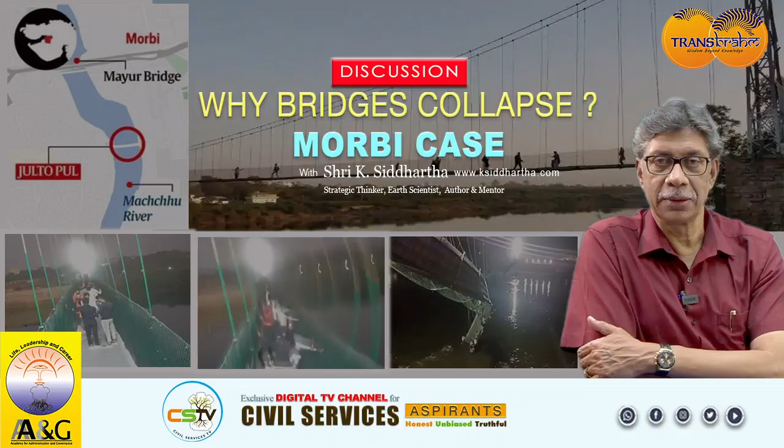By now, this must have become a familiar video for you, although it is pretty painful, quite heart-wrenching, but then this has to be accepted. That is the collapse of the Morbi suspension bridge.

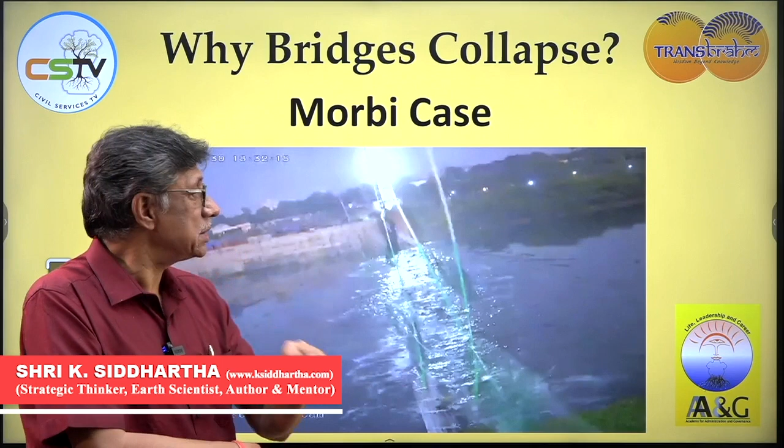Morbi has been one of the most unfortunate towns one can imagine, largely because it was this city which experienced a devastating flood due to the burst of a dam in 1979. Some of you may recall it was one of the incidents that inspired the making of the movie Satyam Shivam Sundaram, also based on a dam burst.

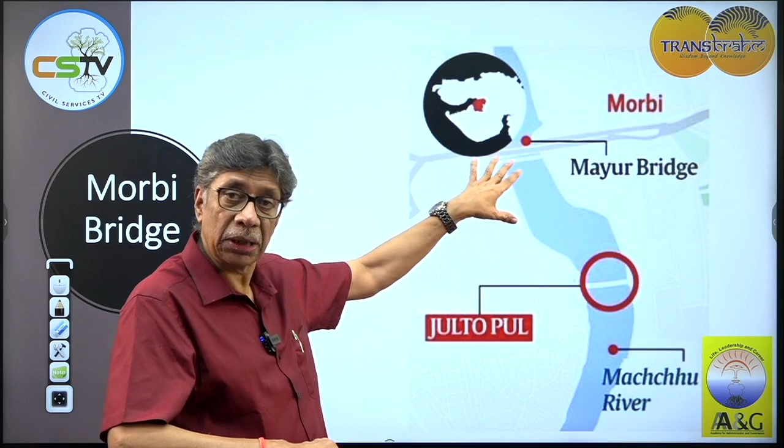Morbi is essentially a small town on the Machchhu River in Gujarat, and it has a suspension bridge on this part. The Machchhu Dam is the one we talked about that collapsed in 1979.

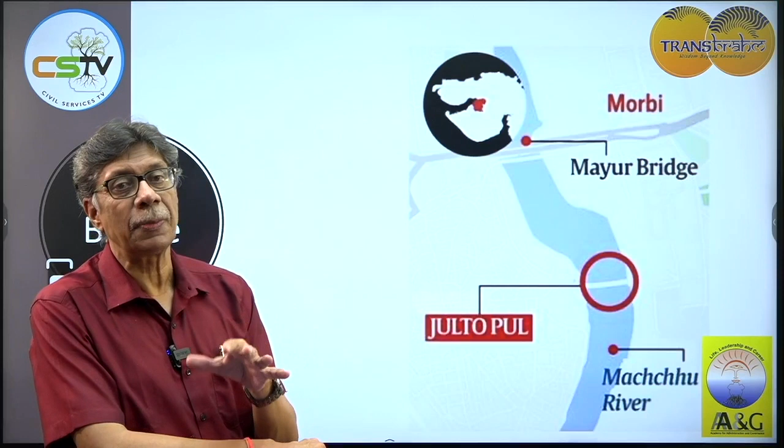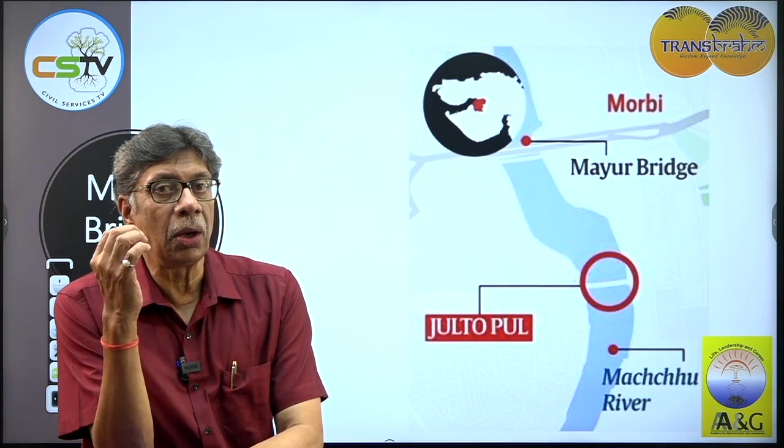Now, when you take a look at the manner in which the bridge collapsed in a single instance, that leaves a lot of things unanswered. What is usually expected in incidents like these is that in such bridges, one or two suspension cables give way, break, and the bridge hangs before the rest of the structure collapses.

With respect to Morbi, everything happened in a flash, because it is generally a slower process. The sudden collapse suggests that most or all of the suspension cables were weak or corroded. This is possible considering it was a very old bridge, but we are also being told that the whole bridge was recently repaired. So, was it actually repaired, or was it some other case?

In Morbi, the vertical cables seem to have snapped entirely from the deck at one end, sending part of the unsuspended deck and those on it plunging into the river. It could have been due to straightforward structural damage, like a material fracture or a failure of a joint, that led to a cascading process of failure—meaning one after the other, after the other.

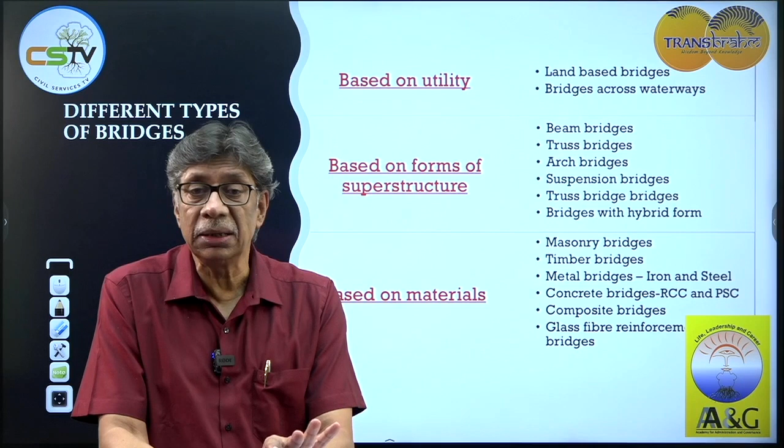These bridges are valuable forms of communication, and different types of bridges are made for the purpose of connectivity—that is, connecting one part of the country with another. But why is it that all types of bridges are made in a different manner and with different materials? To understand this, you must know that bridges come in a variety of types. Based on utility, they can be land-based bridges or bridges across waterways.

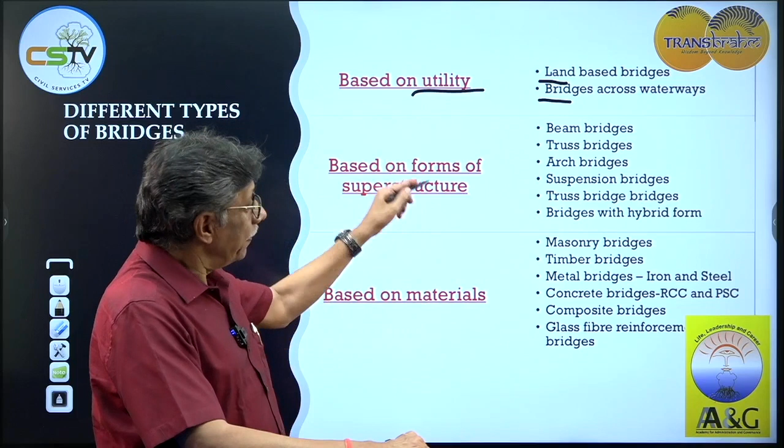Based on the superstructure, it can be a beam bridge—that's the type where you find beam pillars in the water, the most common of them. There's also truss bridge, arch bridge like that of Chenab, and suspension bridge like the Golden Gate, one of the most iconic bridges in that way.

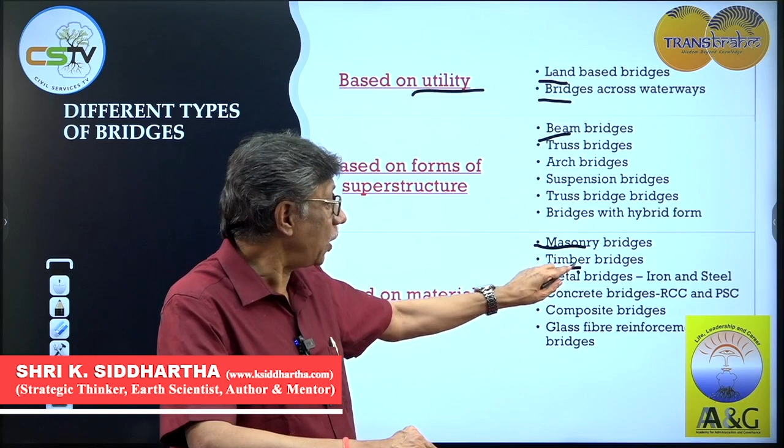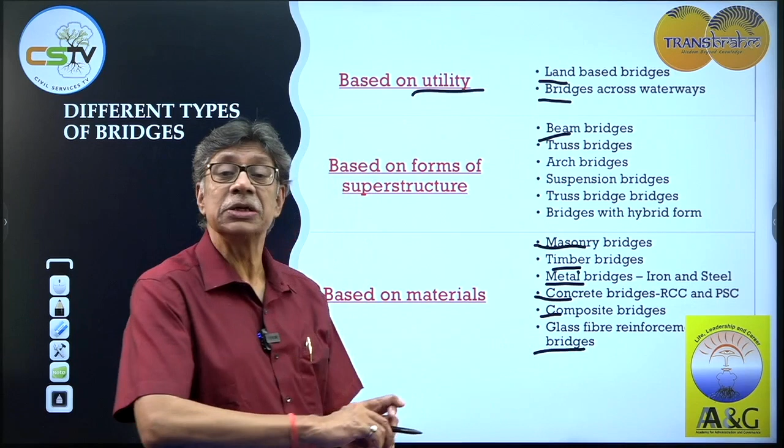It can also be a masonry bridge or timber bridge, based on material—timber meaning made of wood, masonry bridge made of bricks. There are also metal bridges made of iron and steel, like the Howrah Bridge, concrete bridges, composite bridges, and now even glass fiber bridges.

Now, when you take a look at the structure and design of it, you'll find it pretty interesting. That is going to be an arch bridge, this is an arch bridge, that's a cantilever bridge. In this case, this is a beam bridge, which we talked about—the most common type, where the deck is there and then there are pillars, and it is on these pillars that the whole deck rests.

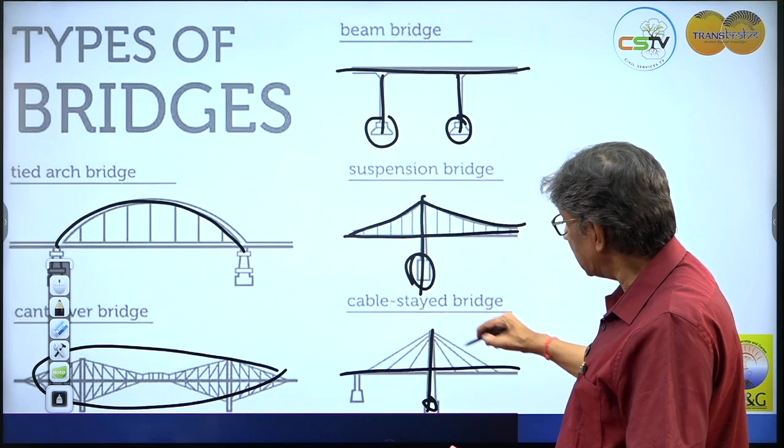Suspension bridge is going to be one of these pillars, very, very strong, and it is suspended in this place. Cable stayed bridges are going to be where the load is completely transferred, and there are different cables which hold it, and that is the way the bridge rests in this place.

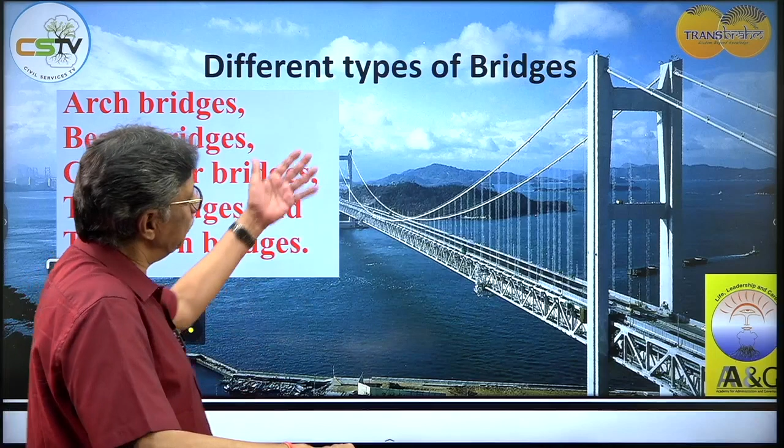The most common examples of it, when you take a look at the pictures, you will understand it as well. These are arch bridges, beam bridges, cantilever bridges, truss bridges, and tied arch bridges.

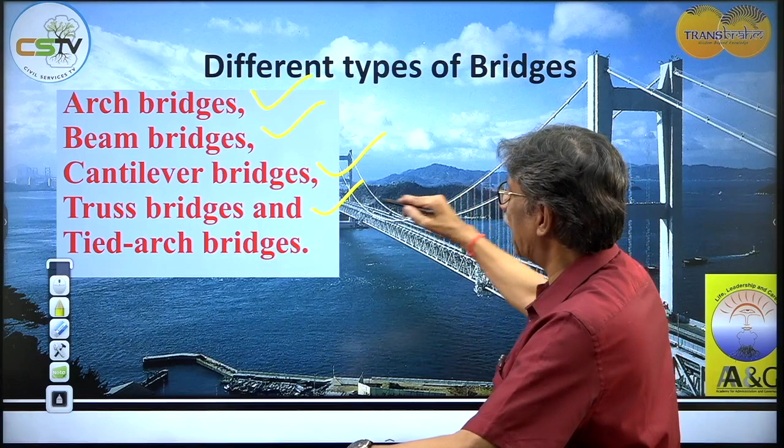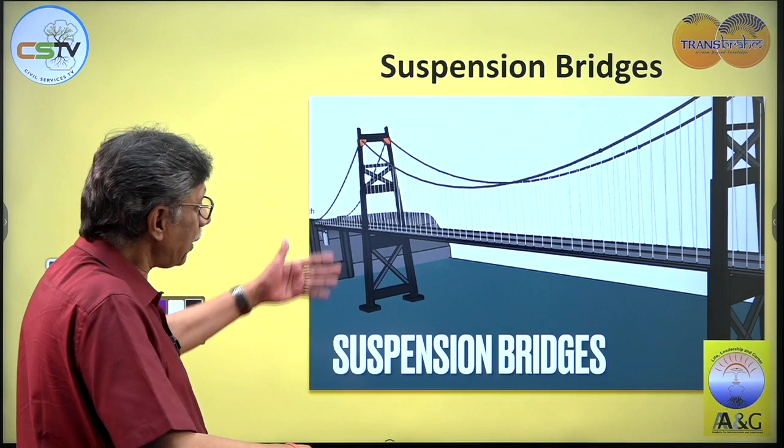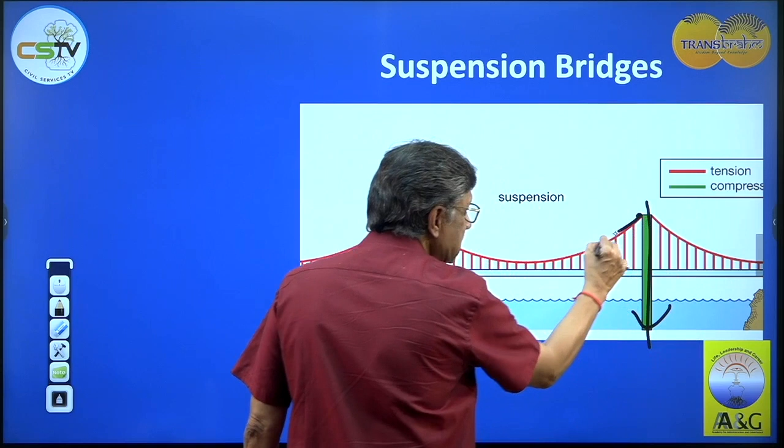These are the two cables. This is the true picture of the Golden Gate Bridge. Suspension bridge, that is the deck associated with it. Taking a look at another picture, suspension bridges are like that. These are the two pillars, and it is on these two pillars that the whole of the load of the bridge goes on to rest. And these are the cables responsible for holding the bridge. It is suspended on those type of materials.

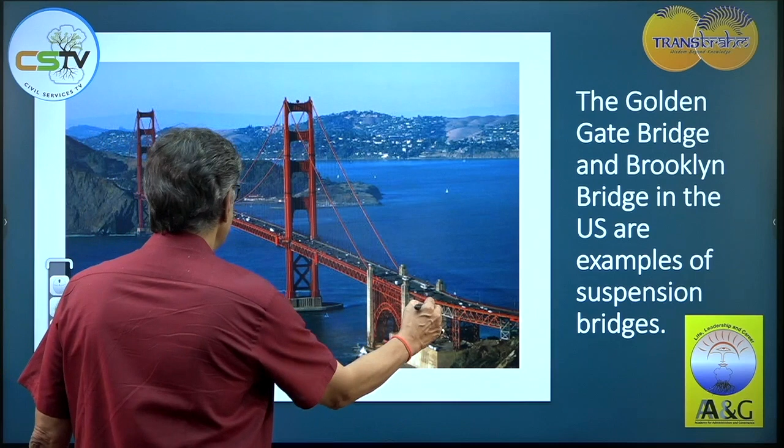The best picture of it is the Golden Gate Bridge and the Brooklyn Bridge in the United States, which is actually a brand of such type of bridge in the whole world. You may have seen it in a variety of movies, including the most recent one that was made on a tsunami.

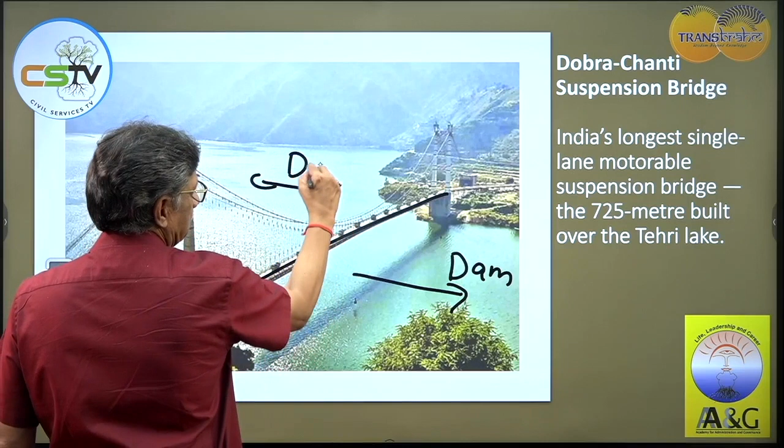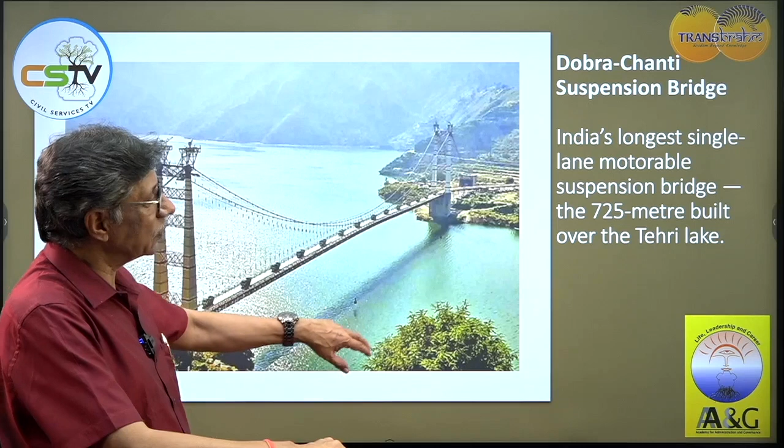It is going to be on this side is the dam, and this is where exactly the Tehri River goes on to flow. It is one of the most scenic bridges one can imagine in the whole of the country, and it's 725 meters, which means almost three quarters of a kilometer in its length.

At night time, it is a sight to behold, actually a sight to behold in the evening, and it is a tourist attraction in this place as well. This is the way that the suspension bridge manages itself.

There is a tower that is for the purpose of holding the load, and these are the cables that hold it all, and the load is completely transferred in this place. That is the anchorage. This is going to be the anchorage. That's going to be the deck, and these are the piers. Of course, this is the main cable, and there is the suspender cable in this case. That's the way the design is made.

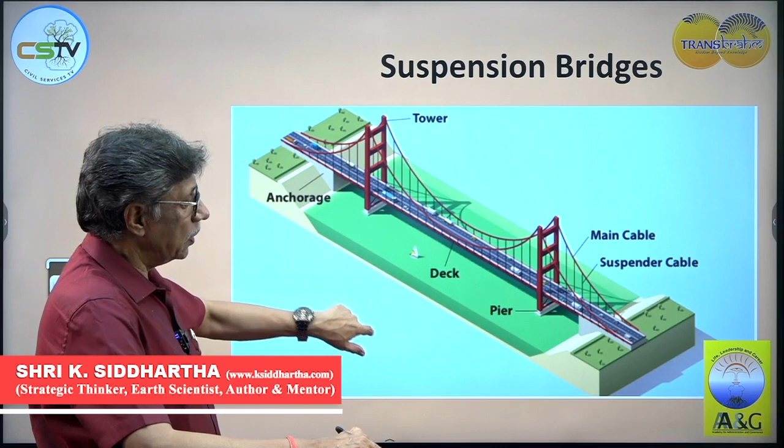Cable stayed bridge means it is only the cable that goes on to hold the whole of the bridge. That is, the deck is held by the cable. It is this type of a... imagine if the whole of this region would have been like that.

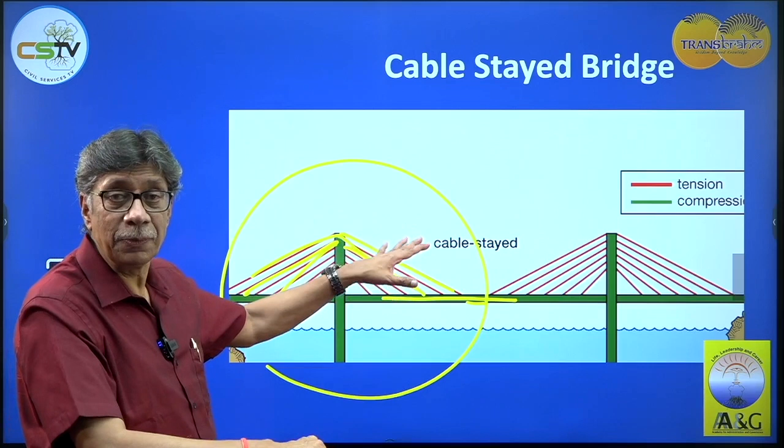That was the nature of the bridge that collapsed in Gujarat on the Machchhu River. Morbi is what we are talking about in this case.

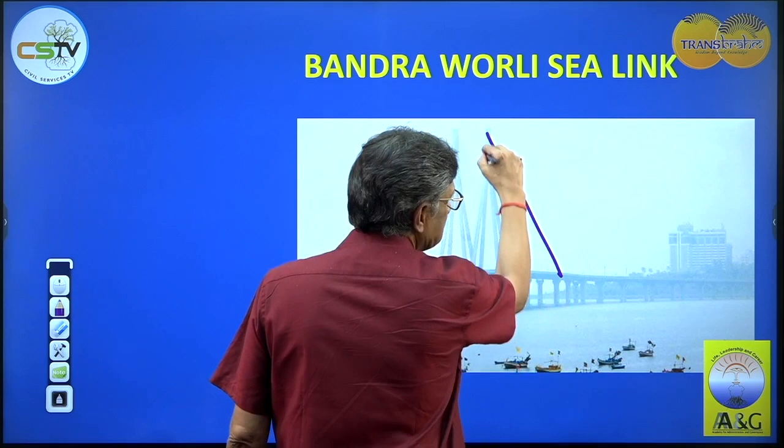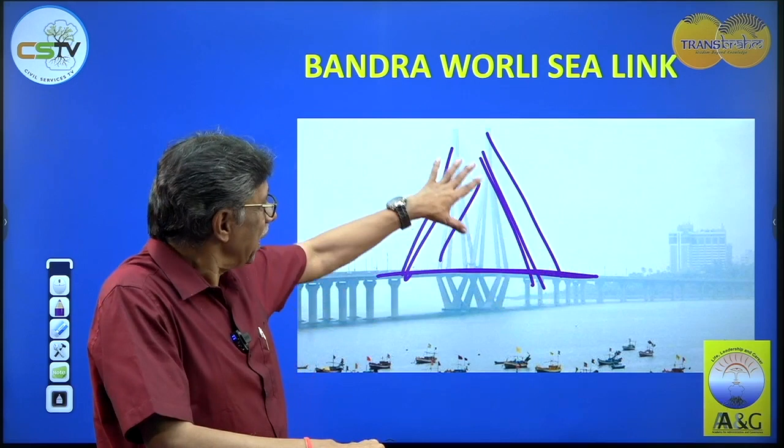One of the best examples of such type of cable bridge is the Bandra-Worli Sea Link, where you have many cables responsible for holding it here. So many cables that go on to hold this entire deck. But then it is a combination of many types of engineering structures. It is going to be a beam bridge as well, also part of a suspension bridge, and a cable stayed bridge as well at the same time.

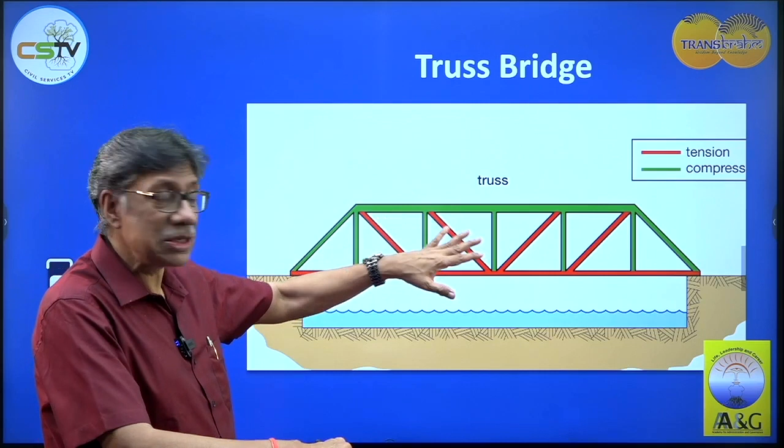Some bridges are called truss bridges, and that is the nature of it. You must have seen it while moving on a train or going through a car. Rajghat Bridge in Varanasi is one such type of truss bridge of sorts.

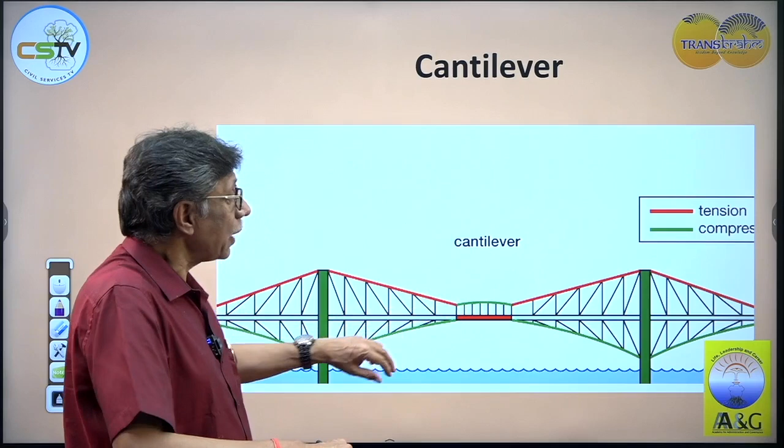Other bridges are cantilever bridges. This is the entire structure, generally a steel structure associated with it. The whole of this place can be opened to allow a ship or a vessel to pass by as well in this case. Then there is the arch bridge.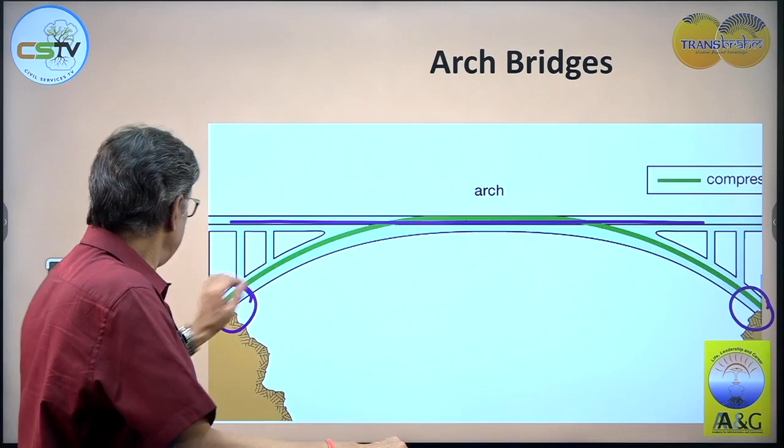Arch bridges have been in use in India, largely because India is constructing one of these arch bridges that is going to be the highest bridge in the whole world. It's going to be a real engineering marvel. In an arch bridge, the whole load of the bridge is transferred here, and that's the way it is stressed, having a deck of the bridge. But because the river channel is going to be so deep, there was no way a pillar could have been inserted here, and consequently this type of arch bridge has been constructed.

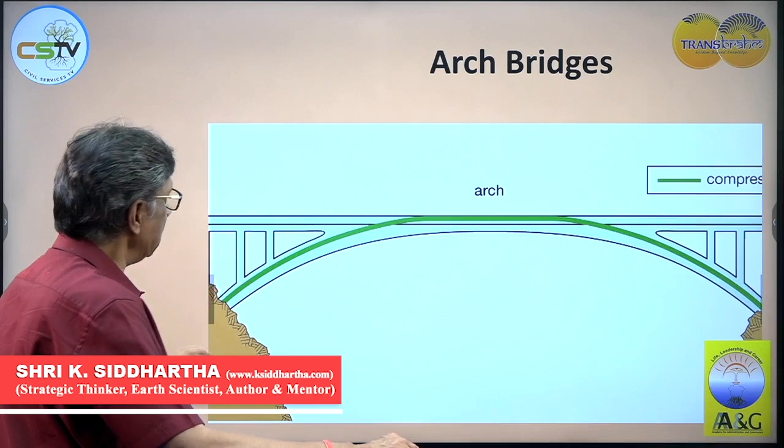You will come to know of it. This is the arch bridge, and it is a real engineering marvel. It has branded our country, and it has been made on the Chenab River, which is so deep. You will come to know about the prowess of this bridge the more you read about it.

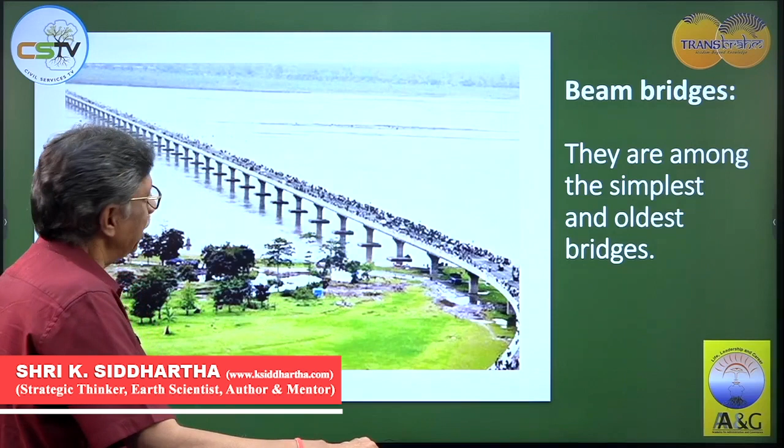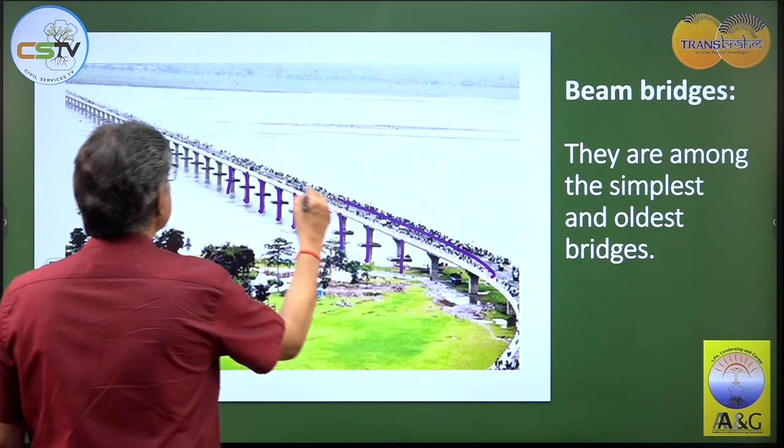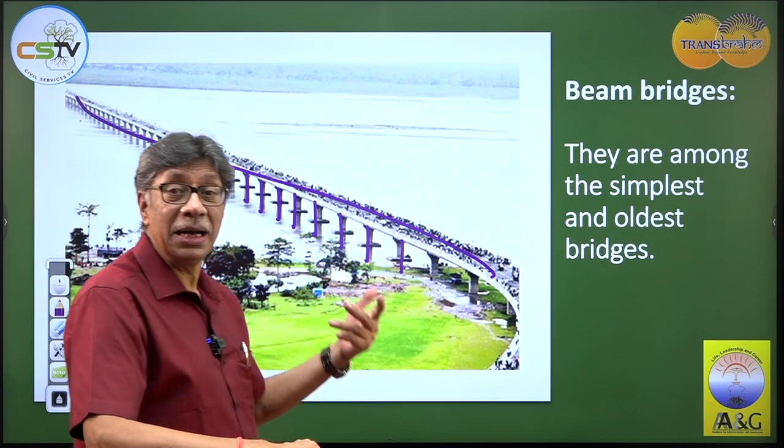Then you have the beam bridge. This is the simplest of this type of bridge, with different types of pillars, and it's on the Brahmaputra River. When we say it's a beam bridge, we are talking about the Bhupen Hazarika Bridge in Assam, a prime example of such a bridge. This bridge is powerful enough to allow tanks also to move on it. Imagine, it is so strong all in all.

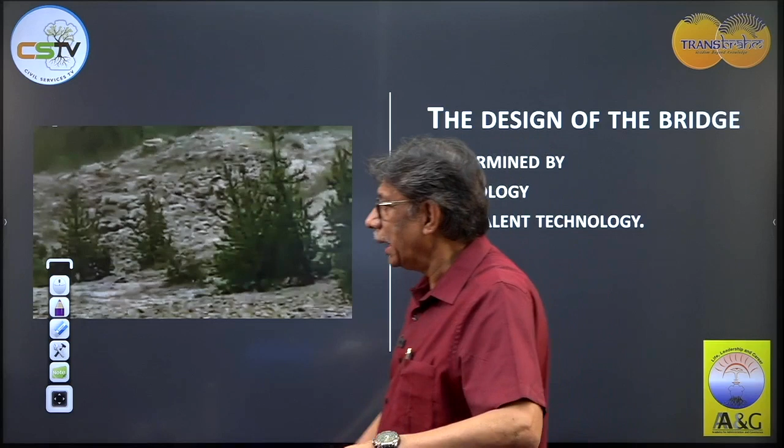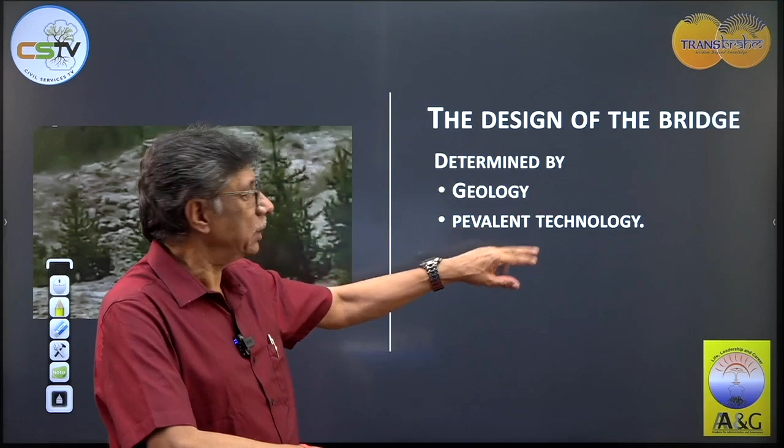Now we must go on to know why it is that bridges are chosen for the design. The most important factor is geology, and the second is prevalent technology. Two factors combine to lead to the evolution of different types of bridges. The first is the foundation in the abutment rock - the foundation on which the whole bridge is laid down - and it must be strong enough.

Take the case of a beam bridge. If the bed of the Brahmaputra wouldn't have been so strong, there was no way the beam bridge could have been made. Similarly, if the bed of the Ganges in Patna is not strong, then again there would be no way the beam bridge could be made. The Bandra Worli Sea Link wouldn't have existed had the bed of the sea not been that strong. So that is one of these factors.

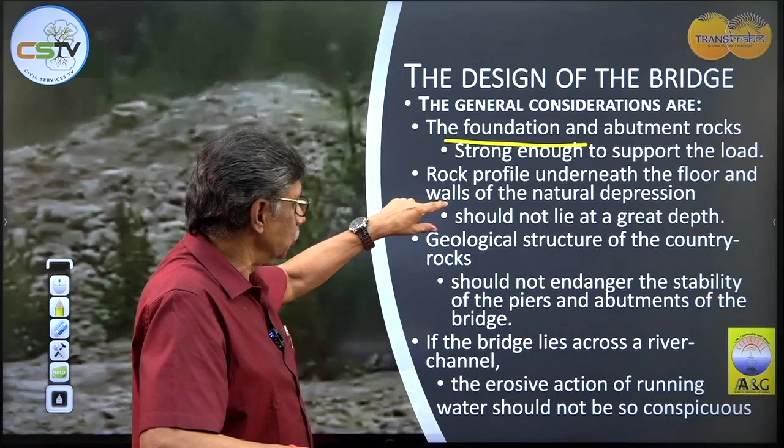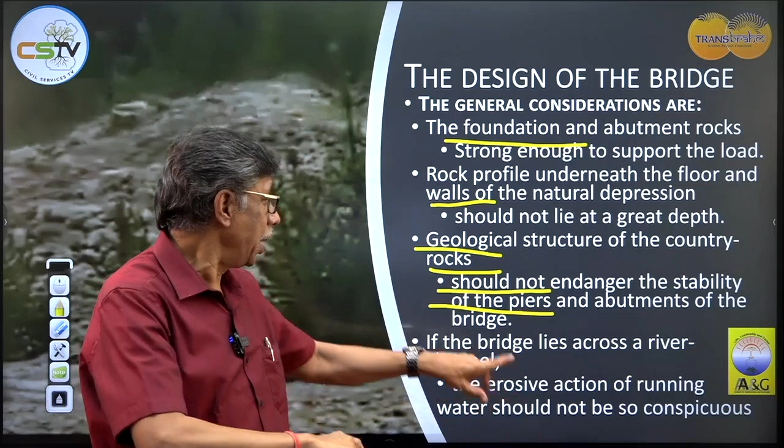Second is the rock profile underneath the floor and walls of the natural depression. The profile should not be liable to landslide or certain types of slippages. Then there's the geological structure of the country rock - the host rock on which the bridge actually rests. Most importantly, it should not endanger the stability of the piers and abutments - the pillars on which the bridge rests. That is the geological structure.

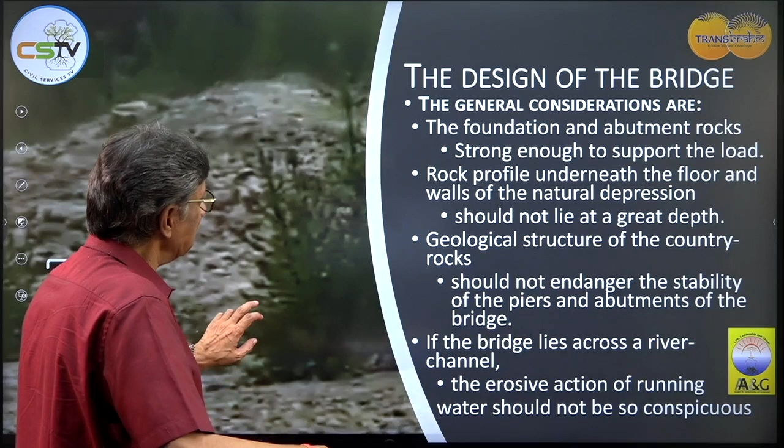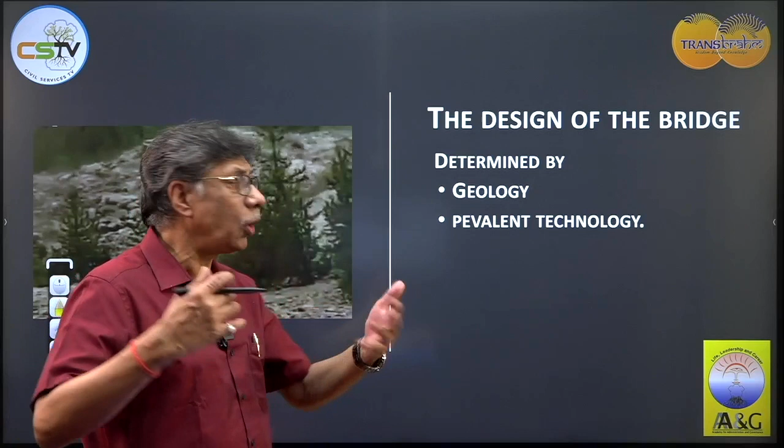If the bridge lies across a river channel, the river should not flow so fast as to create erosion. For example, take this river, which is fast enough and carries a lot of boulders. If it carries so many boulders, they have a natural tendency to cause the entire structure to collapse. If the Brahmaputra bridge, the Bhupen Hazarika Bridge, had been built where the river was very fast flowing with lots of boulders and cobbles, they would have collided with the piers and caused it to collapse.

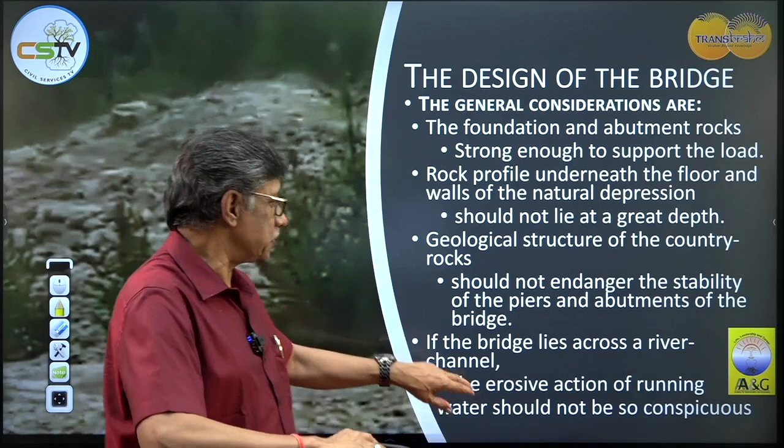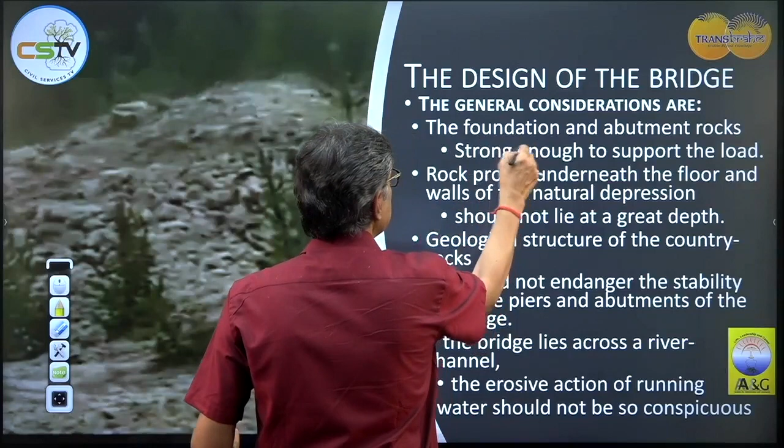Having talked about that, now you can understand why bridges generally collapse. One of the most important factors is the severity of the winds. When the bridge is hit by very high velocity wind, it may be structurally too rigid to withstand that. What the bridge then does is start swaying, moving up and down.

One of these portions sways here and there, and then fatigue sets in. That means all the rivets become loose, and at one time they give way.

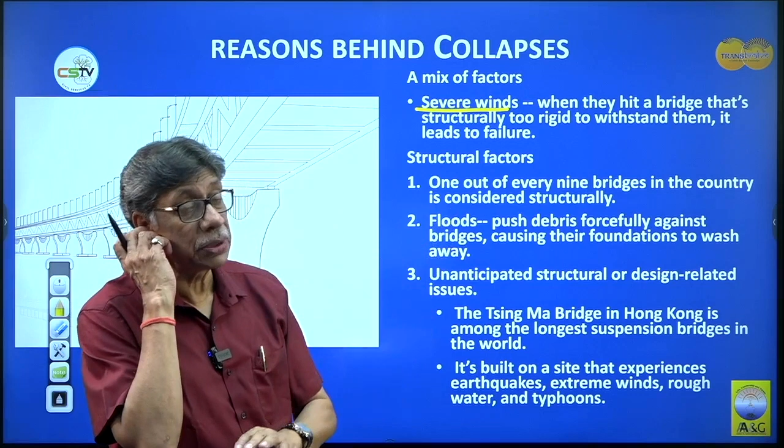Other factor is, of course, 1 out of every 9 bridges in any country is likely to be considered structurally deficient. That means there must be some structural deficiency, and it is liable to collapse or fall down.

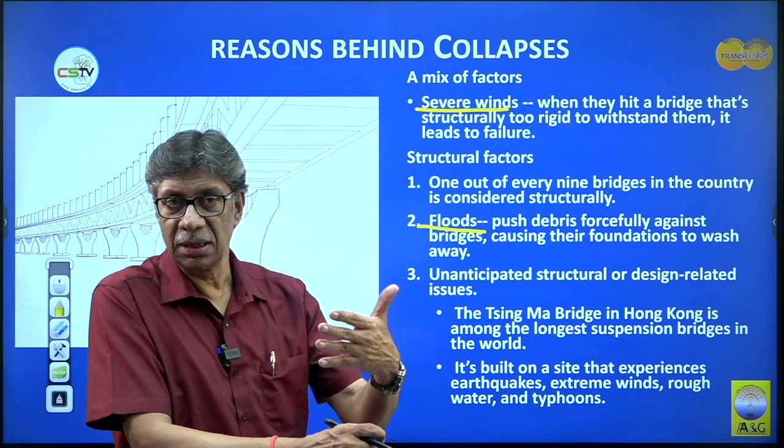Floods can be a factor. If the flood waters are very fast, as you must have seen in pictures with the internet being so prevalent, the debris will forcefully push against the bridge, and if the debris is forcefully pushing against the bridge, the foundation will be washed away.

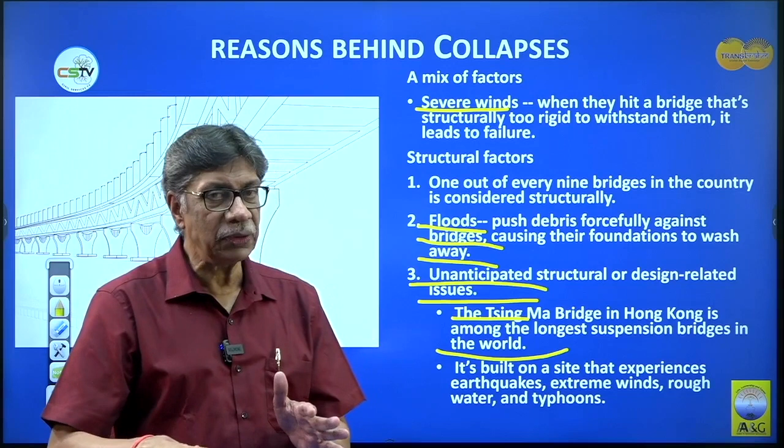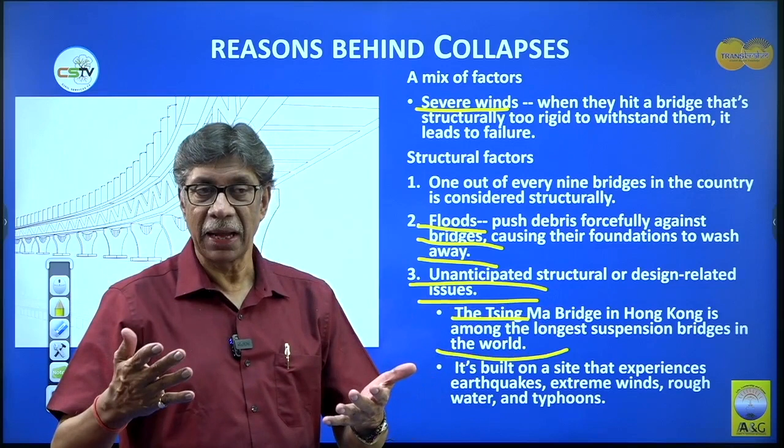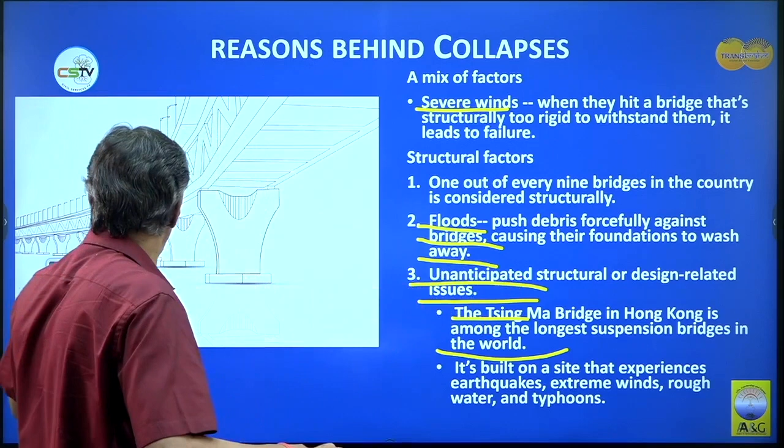Then there's unanticipated structural and design related issues, like the Tsing Ma Bridge in Hong Kong, among the longest suspension bridges in the world, built in a place where earthquakes come and extreme winds occur. What has happened with this bridge is, if an earthquake was going to come to the extent of 7 on the Richter scale, the bridge has been made to withstand 9. If the winds are going to affect it at 240 kilometers per hour, the bridge has been made to withstand 340 kilometers of wind speed. That becomes a factor in this region, and that is how they are not liable to collapse or fall.

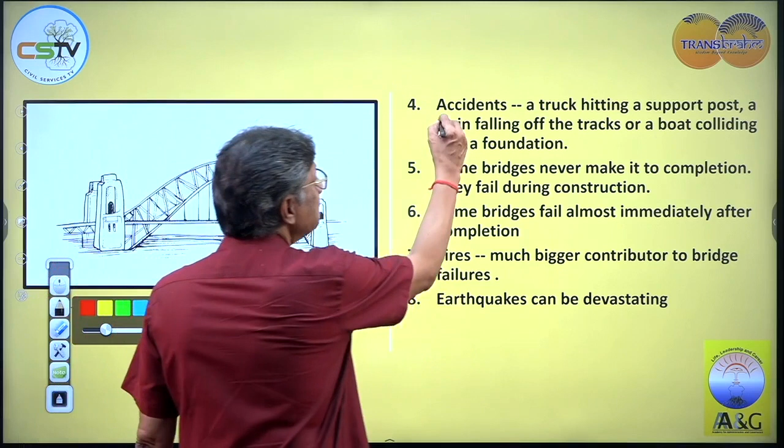Bridges can fall because of accidents as well. Maybe a truck has met an accident, or maybe there is a ship going underneath that collides with the bridge. It may go on to bend the bridge, and it may allow the whole structure to become destabilized.

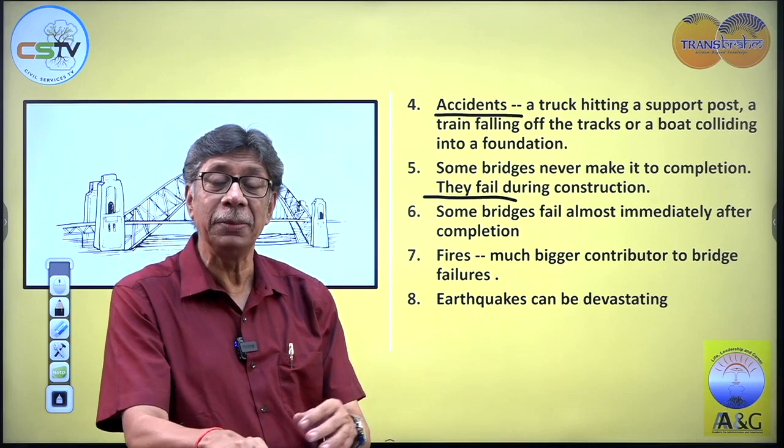That is a factor. There are some bridges which never get completed at all because they fall during construction time itself - that means while they are being constructed, they fail. Some of them go on to fail immediately after completion as well, and there have been many factors largely responsible for such failures.

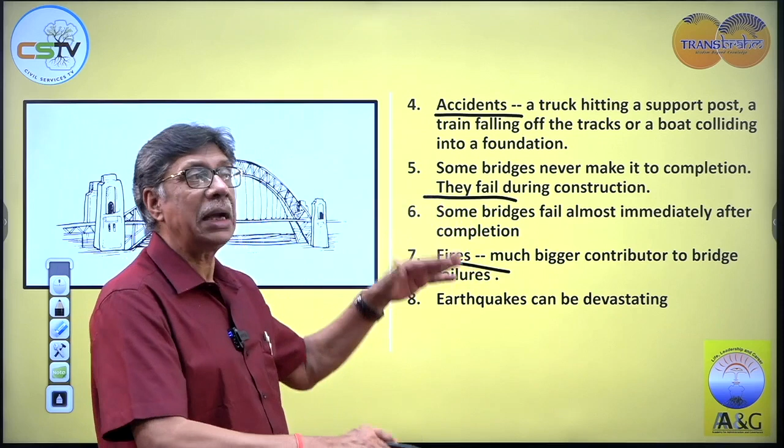There can be fires, which can be a major contributor to bridge failure as well. For example, if this is a steel structure, fires can melt the steel, and these bridges are likely to collapse.

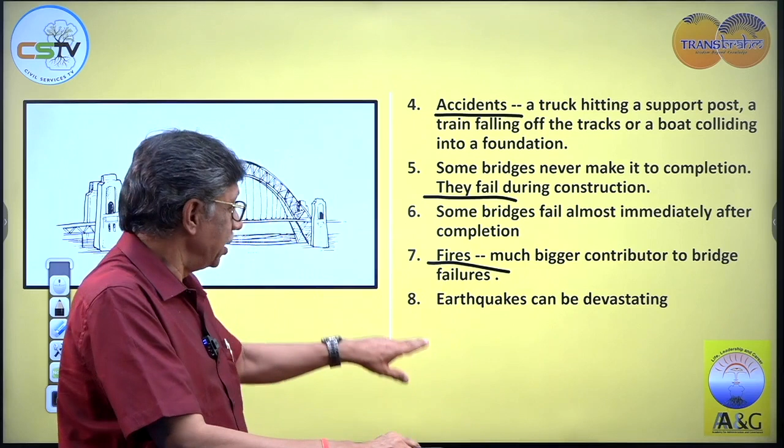Some earthquakes can be devastating in this region, and if some type of collision takes place along with an earthquake, then both of the pillars are likely to collapse in this case.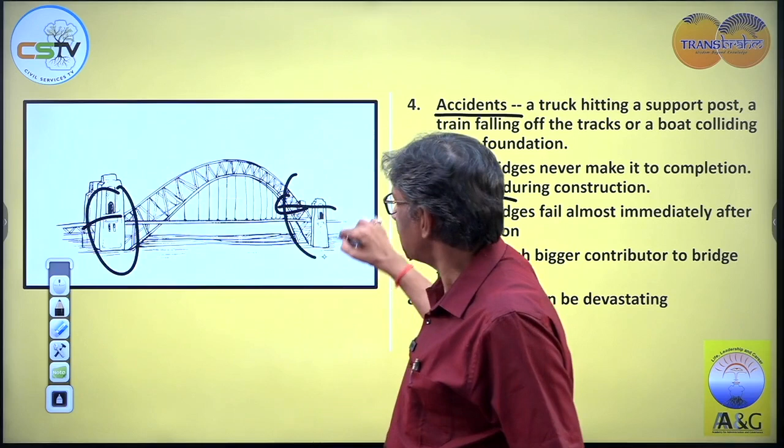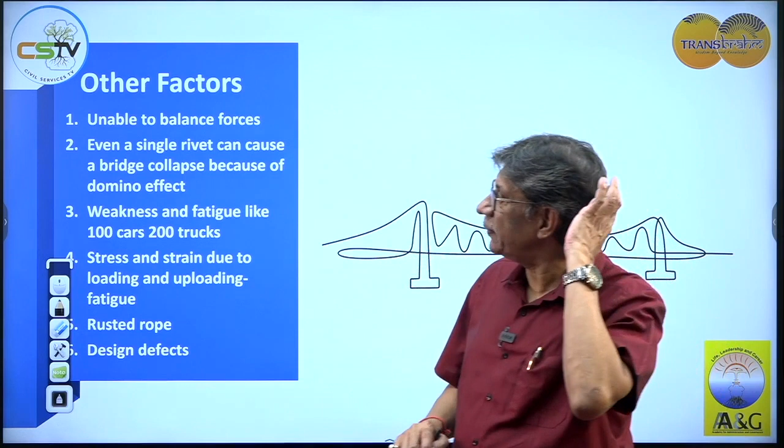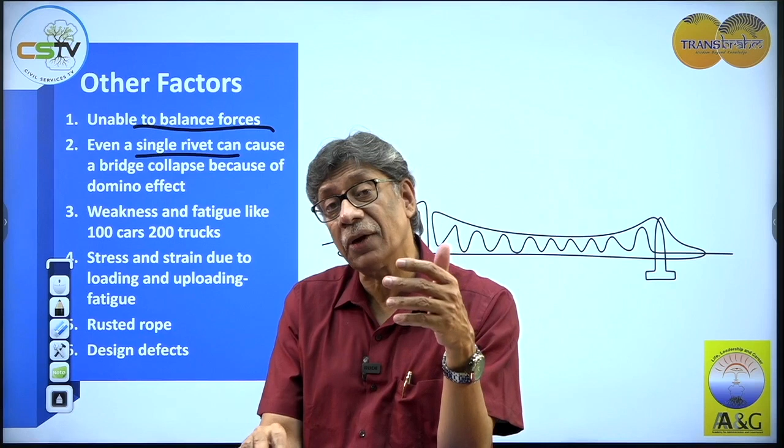There are of course other factors - essentially bridges that are likely to collapse when they are unable to balance forces, because it's a balance of forces responsible for holding the bridge in place. This balance of force can be upset even by a single rivet - can you imagine? It's like loosening the nut of a tire in one place. If a single rivet fails, it will lead to a cascading effect - one effect after the other after the other. So many cascading effects take place that, one after the other, the bridge starts getting weakened. Can you imagine, only one rivet can break the whole bridge.

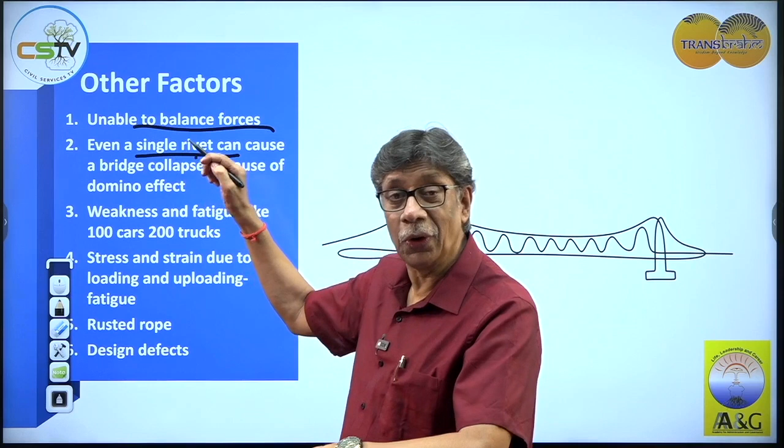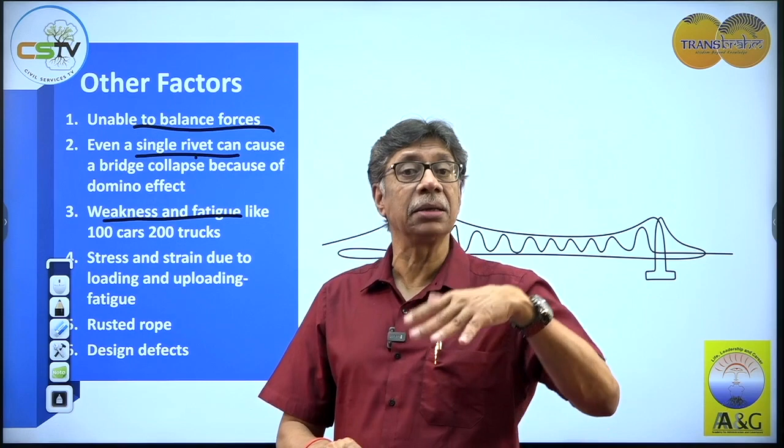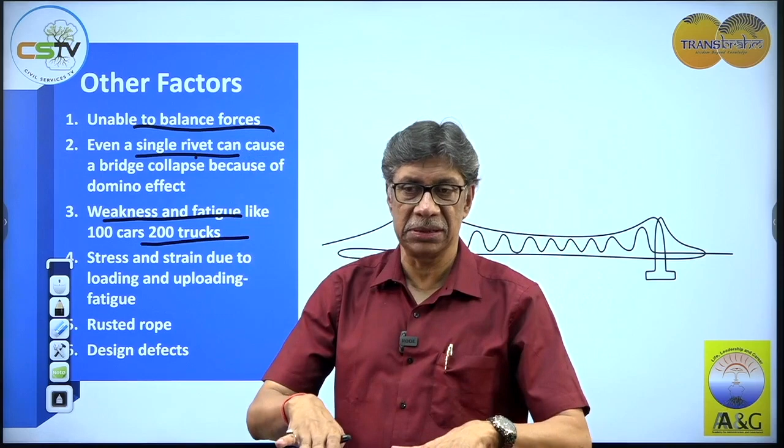It can also be weakness and fatigue. For example, if a bridge is made for handling 100 cars, and it suddenly has to handle 200 trucks, what happens is one heavy truck goes over and the bridge gets depressed, then it gets elevated - it's like stress and strain, one after the other taking place. This is because of loading and unloading, and that is responsible for fatigue, which allows the bridges to collapse.

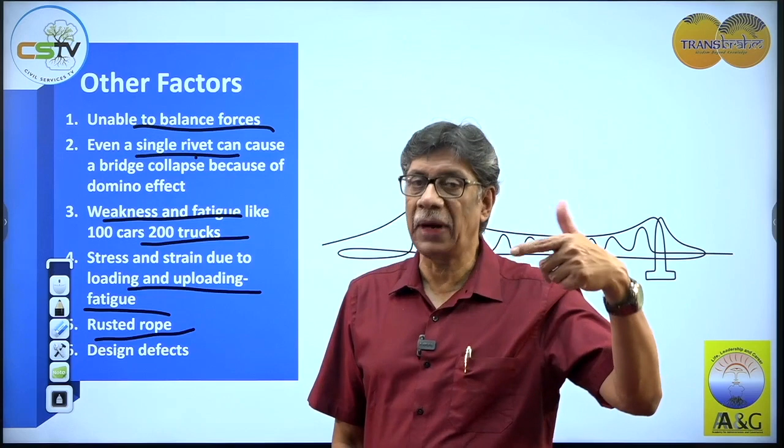There can be a rusted rope as well - that may have been a factor with the Morbi bridge. That means the ropes may have been rusted in this case.

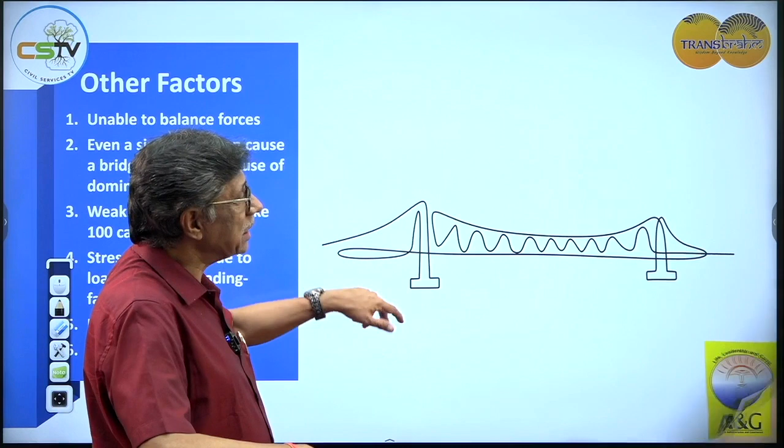Then there are design defects. When we talk about design defects, there can be a variety of factors associated with design that lead to it, largely because it may not have been in consonance with the underlying structure. Now take an example of this region - we are going to be talking about this bridge.

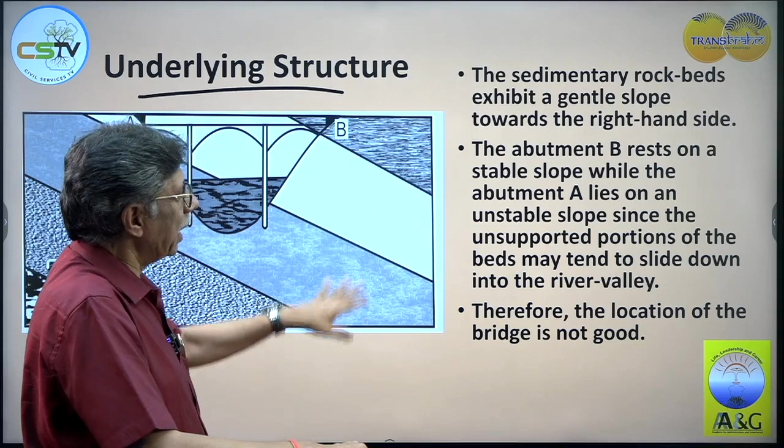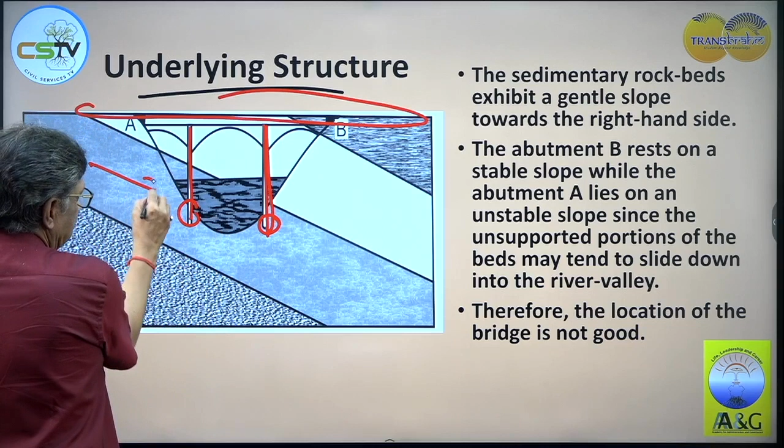The whole of this place is going to be a bridge, and this is the top deck of it. These are the two piers associated with it - one here, another here. This one is liable to move. Abutment B rests on a stable slope, while abutment A rests on an unstable slope and is likely to slide. If it slides, this pier is going to be broken, and the bridge is bound to collapse.

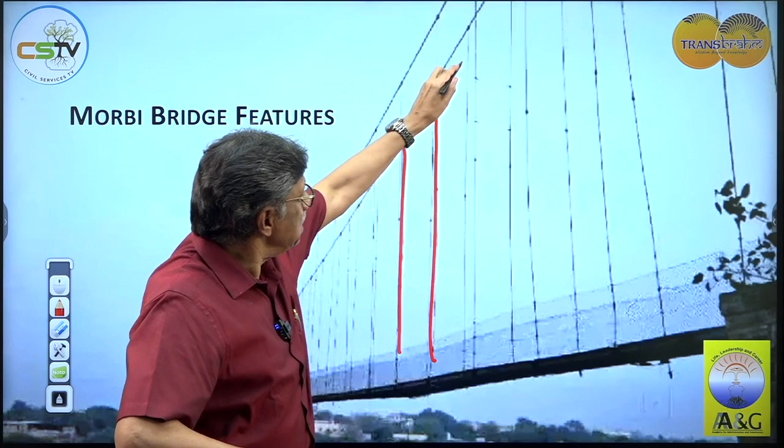With respect to the Morbi bridge, certain things have happened. One factor is that all of these cables may have been rusted. Since this was an old bridge, existing for so long a time, rusting has been pretty normal in this region. So some people who were responsible for refurbishing it may not have been able to take care of it. And who else but bureaucrats would have passed it? They are the biggest villains in some type of cases - they allow a lot of things to happen.

It could have been straightforward structural damage - material fracture or a joint that may have got itself loosened. That is one factor. Second, it may have been poorly designed - of course it was poorly designed, being 143 years old also. A good number of these joints may have been loose, and that led to a cascading sequence of failures that ended in such type of catastrophe.

The chances that resonance or aeroelastic flutter took place looks very remote, largely because the wind speed in these regions was not very high. But the more important factor was overcrowding. It is completely understood there was overcrowding. As you may have seen in the pictures, there were a good number of people who were responsible for shaking it as well. Aeroelastic flutter and aerodynamic instability have been completely ruled out.

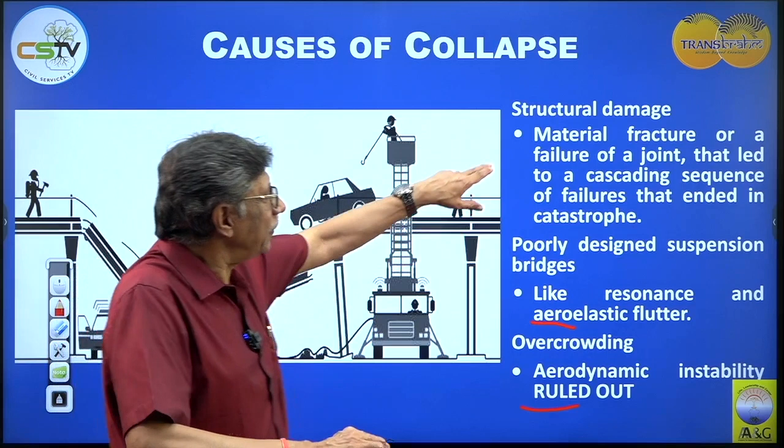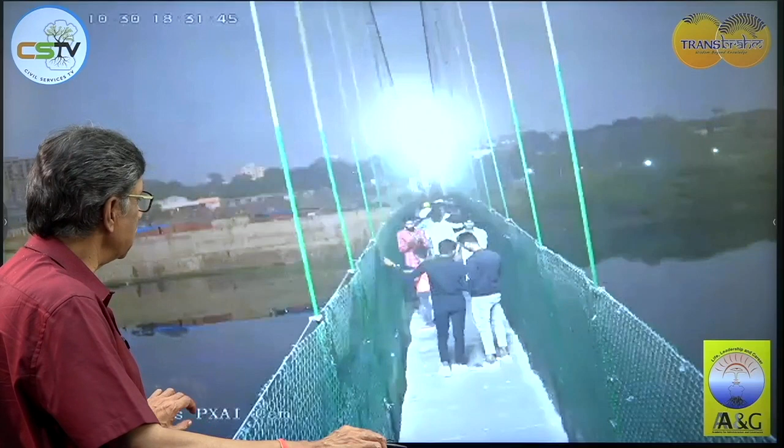So what may have been there? Material fracture may have been there, failure of a joint may have been there, and design was going to be poor in this case. Ultimately, when you take a look at it, you will come to understand that this may have been the most important factor. If you've seen the pictures, you may have realized these cables - people started shaking them, and the shaking of it ultimately led to the collapse. One shaking, another shaking, and ultimately the bridge fell, the bridge collapsed.

That may have been a factor associated with people deliberately trying to do that - there are people with antipathy towards the country who may have done that. There is another possibility that the bridge had become so old that there had been rusting, and it was not able to bear the load of the number of people in this region. The end result has been the loss of life. There are many bridges in the country which may go on to experience the same type of thing - loss of life, such type of accidents.

The basic idea behind discussing all of this is that you must know why bridges are constructed, why designs are differentiated, and how they can go on to collapse. Morbi is going to be a lesson - this is a city which saw a devastation in 1979. This was a second repetition. Not too many people are going to forget it so easily.